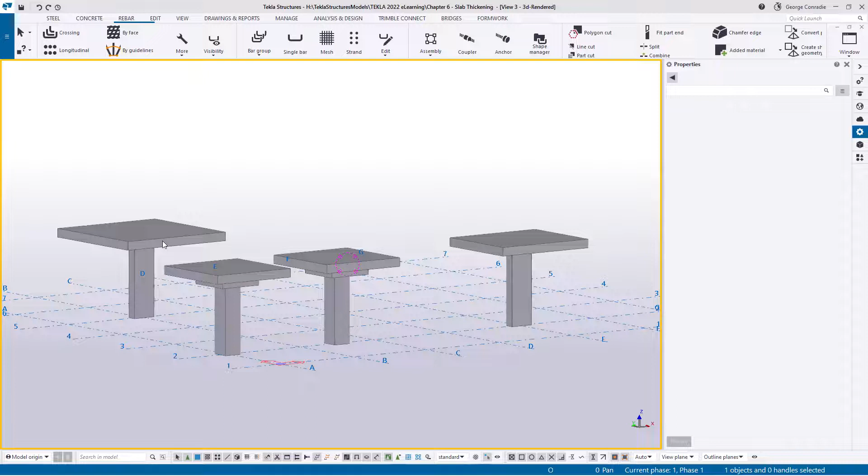I'll illustrate soon with these drop panels, and if I can just go Control 2 to make them transparent. I've already got some reinforcement in the columns just to give it a bit of context.

Now, with the drop panels, normally you would have like an upside down hat in here, and if you just go and Google drop panel reinforcement layouts in your browser, you'll see heaps of examples of how they do that. This is fairly common, but not that common in Australia.

There are also the proprietary options where you can physically go and buy shear stud, almost like shear beams that they can put over the column. They're very expensive though, and a lot of the builders, or customers or clients, avoid them and opt for the reinforcement solution. But that's a very nice solution as well.

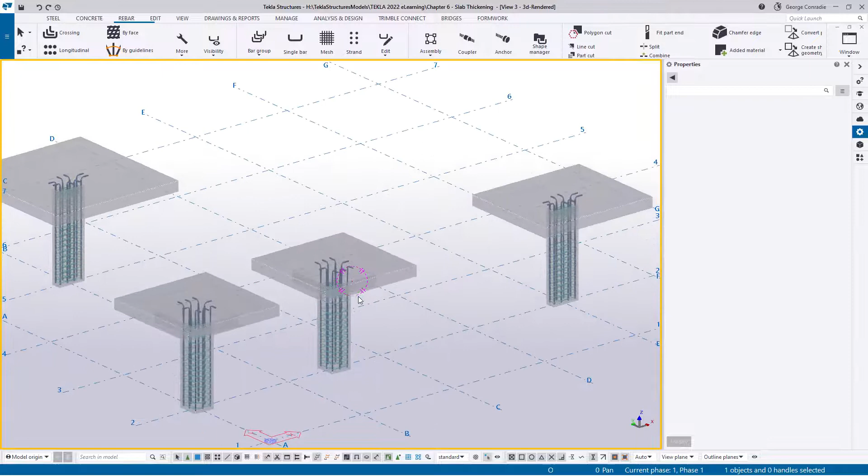But we're going to stick to reinforcement as these are reinforcement videos. So yeah, we've got two identical.

The difference between these two is this one is modeled in a way that you've got your slab, and the drop panel actually goes all the way to the top of the slab. And this one, however, we've got the slab, and the drop panel only goes up to the soffit of the slab. So we'll put bars in differently with these two to get the best out of it.

Now the third option, and for this I'll just bring my little sketch across. So in Australia, it's fairly common to have a layout like this, where you have a column, and then as an additional to your slab reinforcement, they will have a bar specified 8 20s at 300 in the fourth layer.

Now in Australia, the notation is they work from the bottom as the first layer, top is the last layer, it's a four layer. So in Tekla terms, that would be a T1, top layer 1, and the length of this bar will be 2.5.

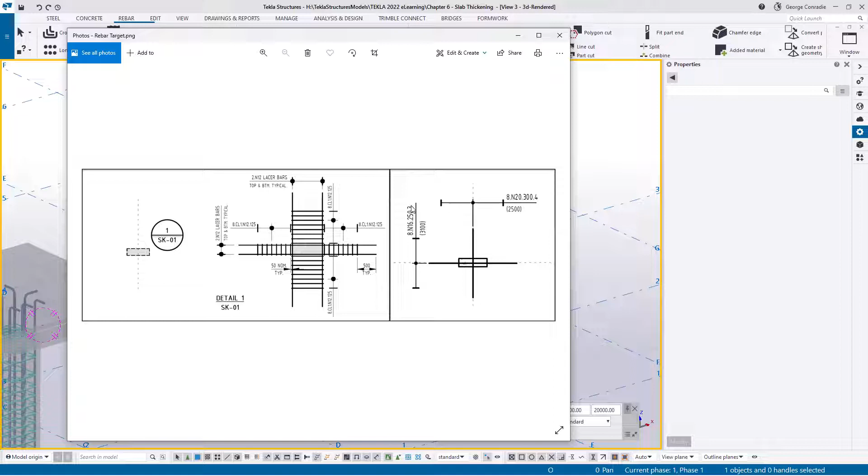On this one, we've got the 8 N16s at 250 3, which means it's a top 2, and the length of those bars are 3.1. And now the other option where we're talking about internal beams is quite often on the rebar layout, you'll see the column and you'll see a little annotation that says look at detail 1 on this drawing.

And if you go to detail 1 on that drawing, you'll see that they've specified 8 closed loop ligatures, which is N12s at 125, and that's pretty much the same on all sides in this case. They also have a bit of a 50 millimeter offset here from the column, just so you don't end up with a lot of clashes.

And then they've got lacer bars, which is 2 12 top and bottom, just to sort of frame it. So we're going to be doing all three of those in this video.

So I think for this exercise, what I'm going to do is I will open a view. Now this is our rendered view. So we want to work on the top, and that's at level 3000. So if I go to my views and I go to view list, I can then go and click my plan at 3000. I also want elevation on grid line 2.

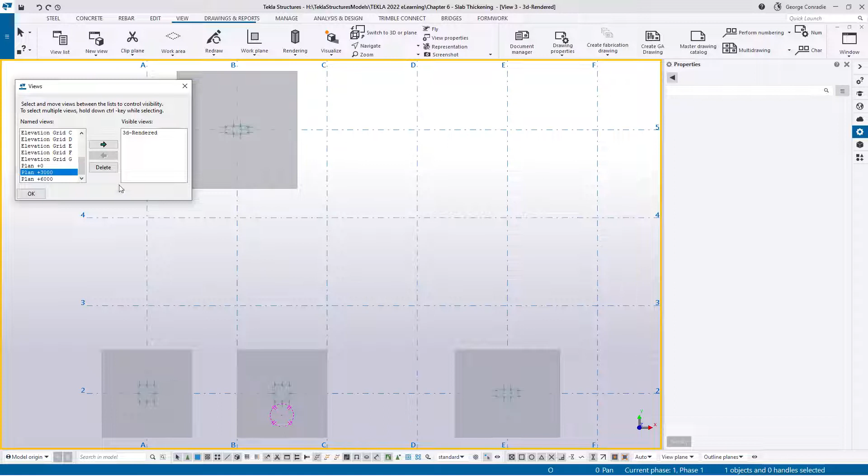So if we go to grid line 2 and pull them both across, they're both across, I can flick back to my rendered view. And then what I'm going to do is I'm going to grab these two, because those are the two ones that we want to work with. I'll grab those two, right click, fit workspace in all views.

So we only see those two columns in all our views. And then I'll also go Control P and just make sure that they're all aligned. Okay, so let's go to the 3000. Let's do this one first. So I'll show you both methods of putting in the same bar.

So when concrete is modeled all the way to the top, you can take advantage of the crossing bar in Tekla, just the crossing bar part. But when you don't have it modeled all the way to the top, then you sort of lose a bit of it, because the faces don't go all the way up to the top that you want, so you lose a bit of the benefit there. You're going to have to stretch and add faces too much.

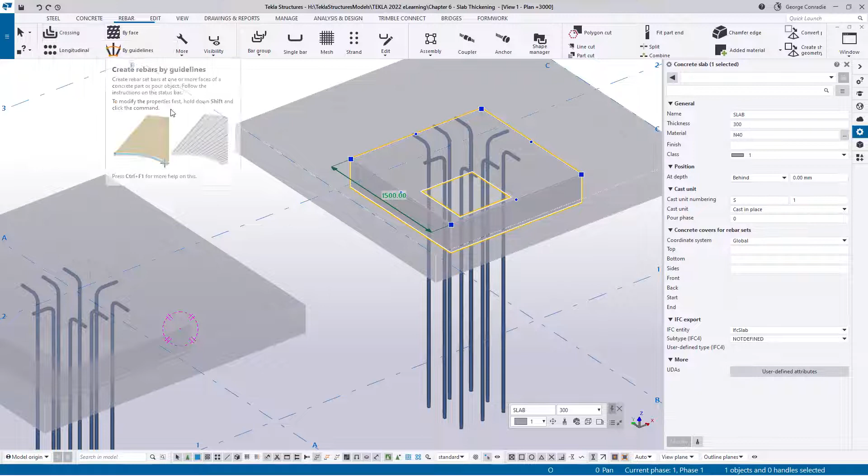Then more point input becomes a better option. I'll show both of them. So let's start with this one. Let's put the top hats into this one first, with the upside down top hats. I'll go for crossing bars, and I'm just going to wing it. I don't have an example like in the other two, so I'll just wing this one.

So in this one, we'll go in and pick a 16 bar, and I'll make it yellow to stand out nicely. I'm not going to worry about the start and end offset, we'll figure that out now. And the target is 200, I'll just leave it like that.

Now when we hover over this one, you can see we're seeing the full depth. If we hover over the other one, you can see we're only seeing half the depth. Okay, so let's use this one.

And then I'm not going to select all the sides. I'm going to pick this vertical, the bottom, and then the opposite vertical, and say OK. And then while I've got that tool going, I might as well pick this side and do the same thing - this vertical, bottom, and the other vertical - and say OK.

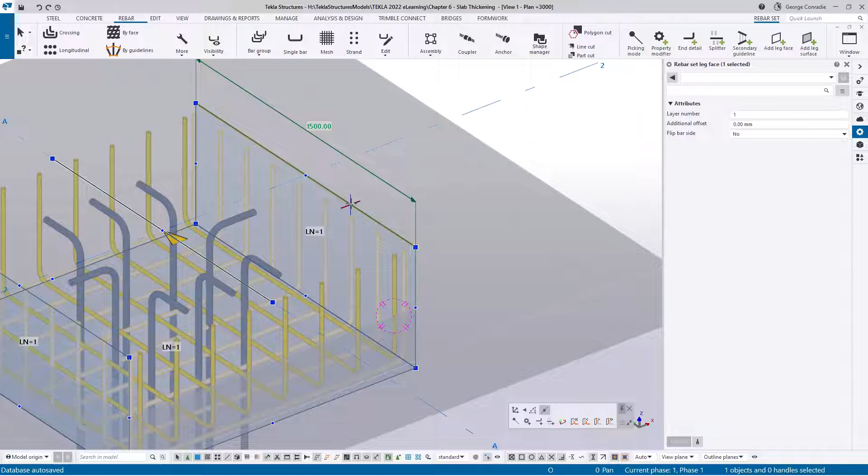That pretty much gives us the layout at the bottom. Now what we want to do is make sure, if it's not on, that your leg faces are on. Then we're going to click on this bar, and when the leg faces show up, we want to click on this edge, and then holding control, drag it - let's say 400 mils - and add another leg to it.

We can do the same on this side. Click the bar, click the edge, and then holding control, drag it. And that gives us another leg.

Let's repeat on this bar - click there, drag it 400. And sometimes when you get to a position where it's sort of lining up with another edge, like a concrete edge, it will try and snap to it. Then lastly, we'll do this one as well. So that sort of sorts out all of that, and we do need to go and look at faces.

Let's just go over to the element, and that seems to have worked all right. You can see this is our main, and we'll have to look at the top where they slot in when we put in our slab reinforcement, just to make sure they're all okay.

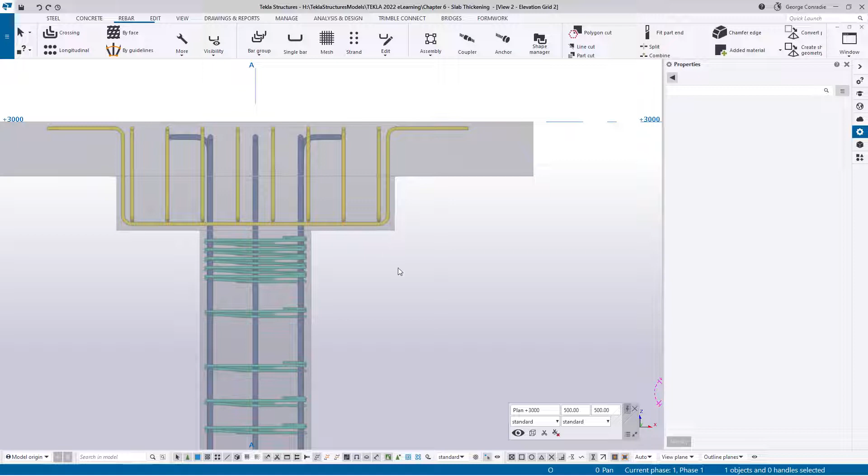I think that's okay. So for this one, we're going to have a different approach. If we go back to the crossing bars, that's not going to work. If we click bottom, top, you can see once we've done that, we need to bring those bars to the top. Now what you'll have to do is click on here and start stretching this by grabbing this arrow to there, and once you've got that, you can click on this edge, holding control, and stretch it away. So it can be done, but it's an extra step of stretching.

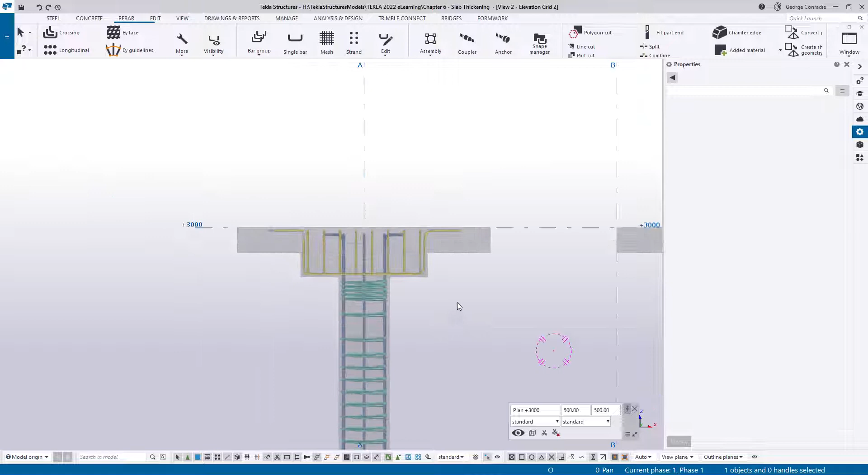So what I'm going to do is undo all of that, and go into the elevation view. I'm going to go to this elevation, and we don't have a snapping point there, and even if I use perpendicular, Tekla won't find the side. So what you're going to do is take an L for a construction line and draw up a little bit, and the same on this side.

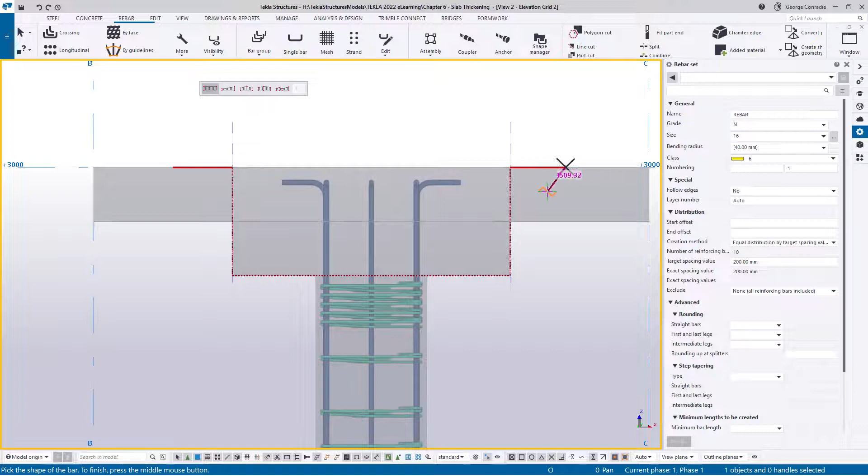So we can just define an intersection point there, and then it's as simple as going to more, point input, and just trace the shape of the bar around the concrete, like so. Don't even worry about your legs, you can fix them later. Once you've got that, the shape is defined, and if we go to the 3000 again and control P for the top view, you can see there's our bar, and we can say the range is between that point, and that will give us the result.

Now I'm not going to do all of that in this one - it's just to show you an alternative way. But what you must take note of is that in this one, for instance, we will have to check the layering.

Like in this case, if we click on that bar, we can see that this bottom face, the cover, is on the wrong side. So all you have to do is say flip the bar, and it flips that face only because we highlighted that face.

The next thing we need to do is click here, right click, and go to inquire. You can see that your A and your B dimension are odd dimensions, and maybe we want to force 400.

So what we can do in this case is click on the bar, go to detail, and load our standards. For the hook type we don't want a hook, and for the adjustment type we want a leg length, and for the leg length value we want to do 400. With that we can just hover over this edge here.

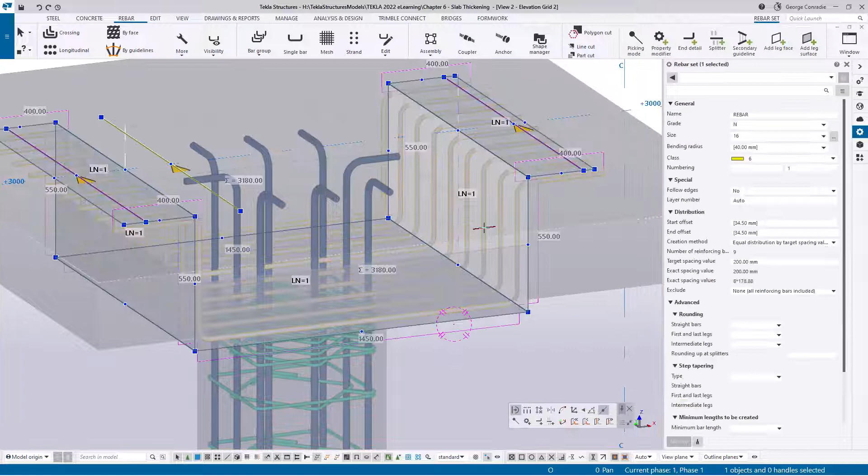There we go, that's 400 now, and if I click on this one as well, that will be 400. Now if I click on the bar, right click, and say inquire, you can now see we've got our A dimension at 400 and our E dimension at 400.

So that's perfect. Now we do need to do it on these as well, so for those, I'll just right click to show. If we go inquire, you can see we've got arbitrary values here.

So just to ensure we've got the right leg we want there, we'll keep our settings as we had before, and then we can just click on this one and hover over to the other side, click on this one, and then the other legs, click on this one, in detail, pick this side.

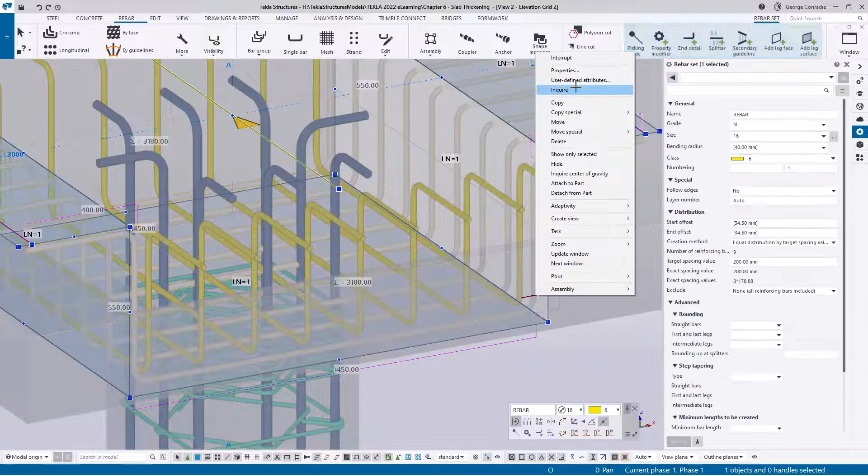You can see as I click on it, Tekla immediately fixes up the leg length. And now in both these cases, if I click on that bar, inquire, we have our 400, 550, 550, 400, and then the bottom leg is 1450.

And if we look at the other one, this one will have a different depth. We've still got our 400, but now we've got 530 instead of 550 because of that difference there, and then 400. So that worked out pretty well.

So now that we've got that, what we can do is just put in some bottom and top reinforcement to show it in context. For that, I'll go straight to our level at 3000 rather than using the elevation.

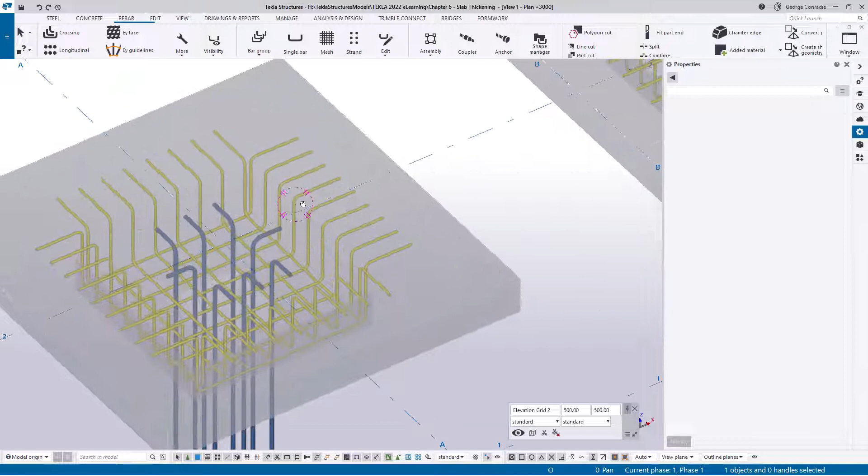What I'll do is go by face, and just load the standards again, and 12s in this case is okay. I'll just make it 12 main rather than 12 ligature, and for the class I'll stick to 2. We'll do the offset in a minute, and the spacing at 200 is fine, so let's just leave that.

Then what I want to do over here is create it on the near face, that's this face closer to me. I don't know what the direction is going to be, I'll just pick a direction, and I do want the whole face.

As soon as I hover over this, you'll see that Tekla lights up where it's going to put the reinforcement, and the side you pick is going to be the main one. Our orientation at the moment shows bars in that direction, but what I'm going to do is say I want it in both directions, and then if I hover over that, it will create the bar.

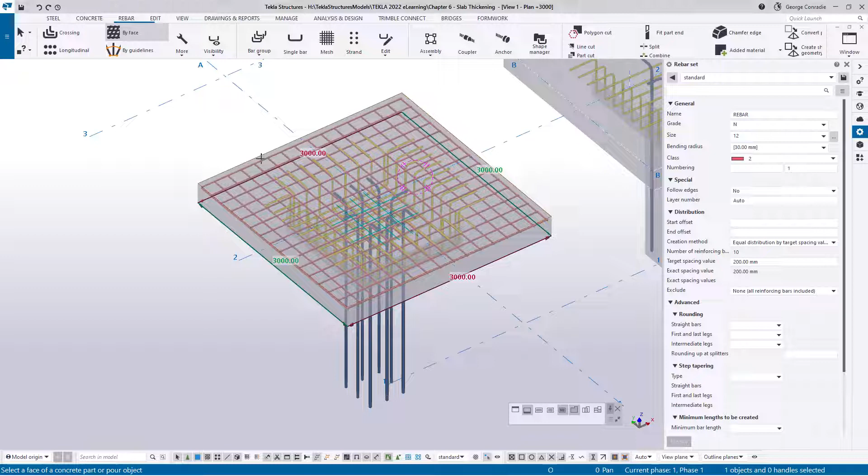Then I can just go and pick the bottom and hover over the same, and you can see the polygon that Tekla is showing you there, and if I click that, it will show us bottom reinforcement. Now all we need to do, Control P, is just go and look at our spacing quickly.

So if I pick all of them and make it, say for instance 100 by 100, just to get it away off the edge a little bit so it looks better, we can now see all the reinforcement in there. And now we need to just finalize our layering.

So you can see because we put these yellow bars in before the red ones, and because these are secondary, let me just give them a different color so it's a bit more obvious what's happening here. So these red bars on top should be in layer 1.

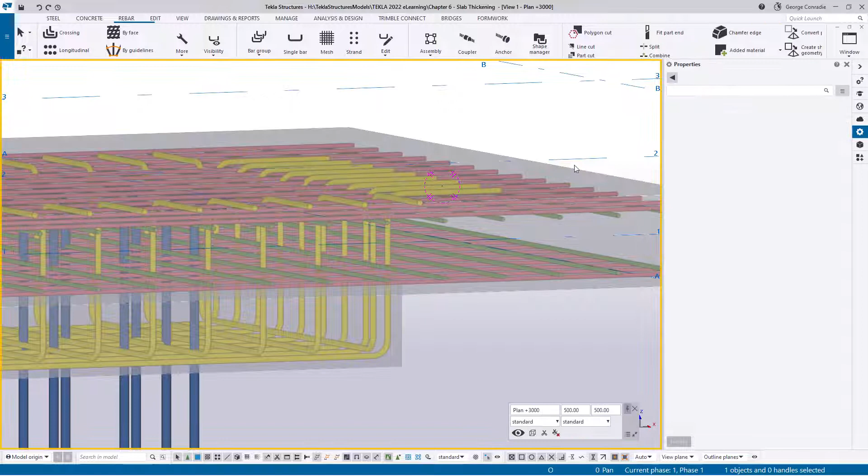One note before I do that: if you click on this bar and click here to move to the outermost, it's going to flip all these around, and that's not what you want. You want those yellows to stay where they are. In this case, you click on the face and change that face from 1 to 2, and that will only manipulate that bar without screwing up the other bars. So you can see that's exactly what we want.

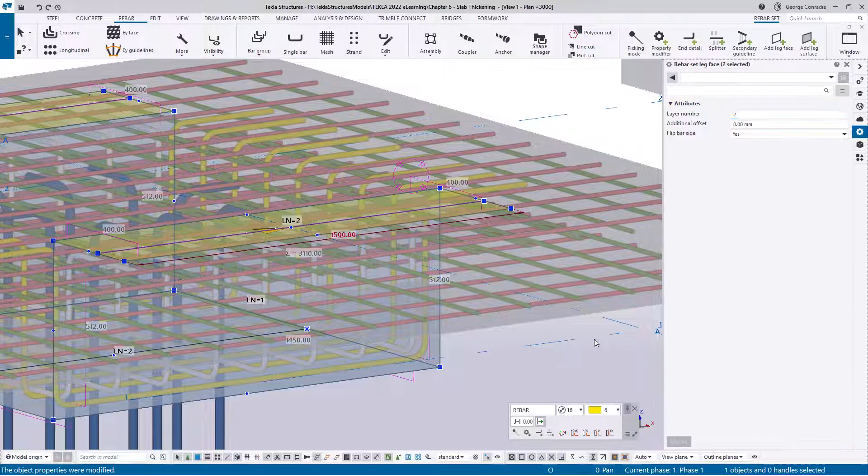We'll have a look at that bar now, and then for the green bar, click on the face again and make sure it's in the second layer, and that's correct. Then for these bars, if I click on these yellow bars, this face and that face cannot be in layer 1, it's got to be in layer 2. So if I click there, layer 2, you can now see Tekla puts that into the layer for us. At the bottom, we can check the bottom two layers to make sure. If I click on that layer, that's 1, that's correct. If I click on this green one, click on its face, that's layer 2, that's correct. So that all works out quite nicely.

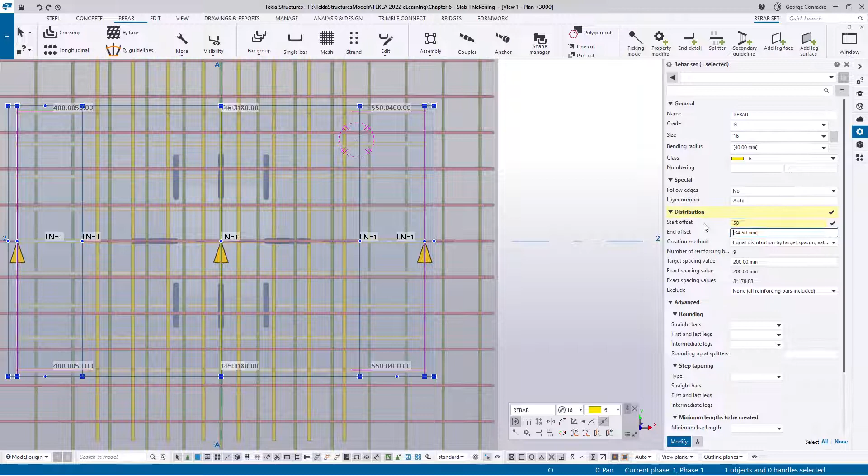Now, in terms of bars that clash, like this one sitting on top of each other, what we could do here is say these are 50 off the side, just to get them away from the corner a bit. And these can be the same. Although Tekla's come up with 34, so let's leave it like that because it's obviously calculated where the rounding of that bar is. That looks pretty good.

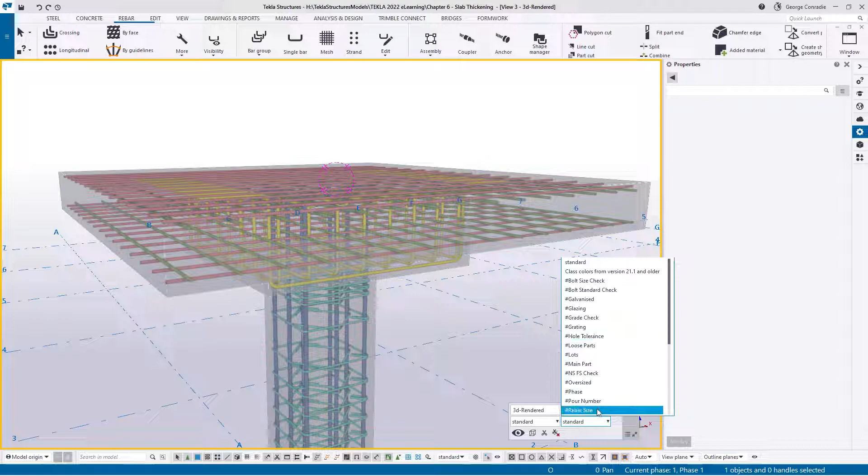Nothing is clashing now. Now what I'm going to do is grab this one in rendered view, right click, fit in all views, so we only see that one. Then I'll also go to Control P, put it up in its perspective view so we can see nicely what this looks like. And then to really make it stand out, to show what we've achieved, we can go to our reinforcement view. Okay, and there we go.

And then lastly, if we go to our presentation, what we can do is show the 12s, because that's what we've got in the slab. We can show them as light gray, also show them as 90% transparent, and also show the concrete as 90% transparent. Once I've done that, save, modify, apply, okay.

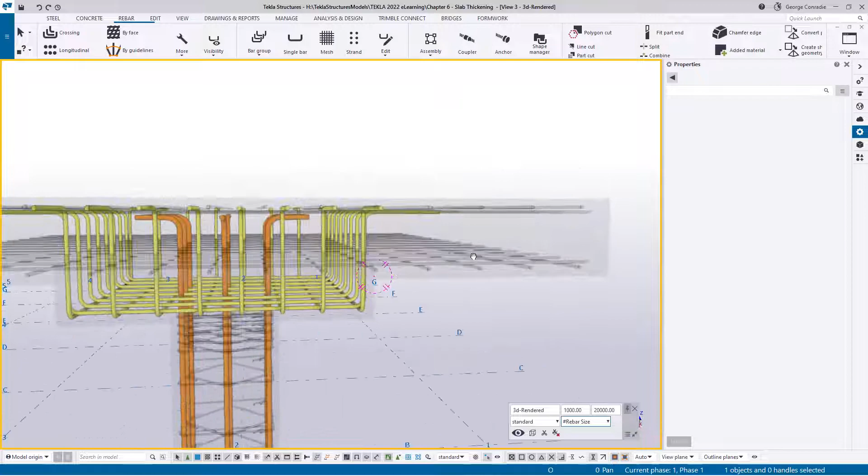If we now zoom up here, we can clearly see what we've achieved. The light gray transparent bars are the reinforcement for the slab, and the yellow bars are the shear drop panel reinforcement. You can also see the column reinforcement sticking out nicely there. So that's a pretty good solution. It's a very easy thing to reinforce, and you can get it clash free pretty quickly.

So let's move on to the next example, and I'll flick back to my standard view here. I'll also go to orthogonal, modify, OK, and in this I'll go entire model. This one here we don't need anymore, I just showed the alternative, so I'm going to delete that. Then let's focus on this one. I'm also going to isolate this, grab this, right click, fit in all views, so we should see only that one in 3D and in the elevation.

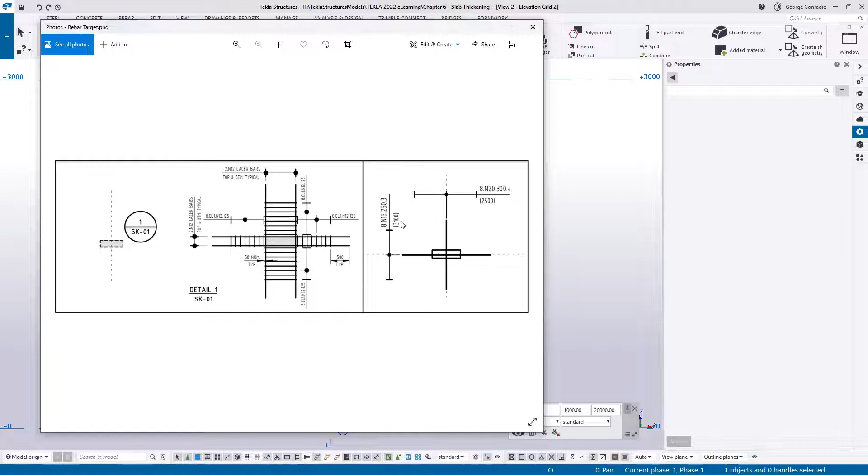Okay, so what we're going to do with this one, I'll just drag my sketch in again. We're going to go for this option where we have 8 N20s at 300 in the top one layer, and then 8 N16s at 250 in the top two layer with the different lengths of bar. So we'll just take note of that, and I'll drag it away again.

So for that, I'm going to go over to level 3000. Now, what would have been very nice is if we had the ability to go to edit and go construction object and go poly offset. Maybe we should just do some calculations first before we fill that in. So they want 8 N20s at 300, which means it's 7 spaces.

So 7 times 300 is 2.1. If we divide that by 2, we need to offset that by 1050. If we could click in here and use the grid line to offset, that would have been fantastic, but Tekla can only offset from construction lines at this point.

So if we draw a construction line along the center there, just make sure it clicks. Along the center, we draw another construction line along this center of the grid line. And we try and offset now, Control O, and we plug in our 1050.

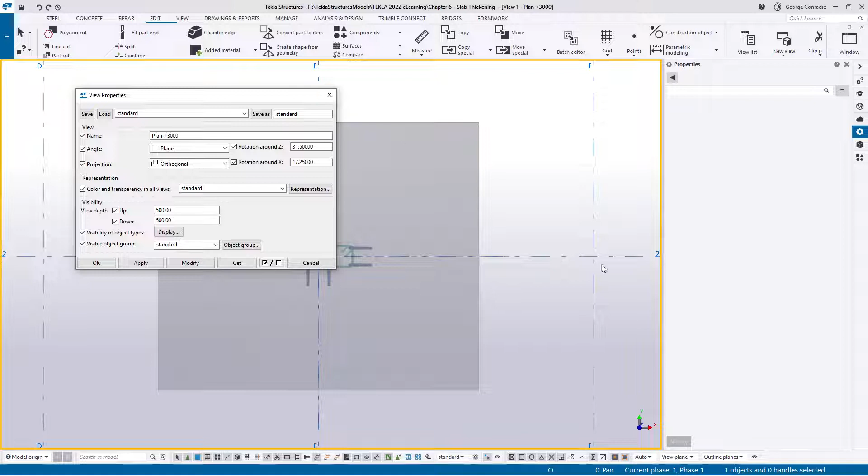Again, if we click on the grid, you can see it selects the grid, but it won't offset it. So the workaround here is to just go into your visibility settings and switch off your grids for the minute. And now if you go Control O, you plug in your 1050, you can now pick that construction line, and just like that, it now offsets it.

So that's the range, and the length is 2.5, so it's 1250. So if we type in here 1250 and we offset these, that is the area of influence of the top bar.

So what we can do now is we can go to Rebar, and we can go to Face, and the bar he wants is 20s. I'll keep it yellow, and I will make these 0 because we're working with absolute.

It's got to go from there to there, the middle of the bar, so it's got to be 0, not cover. And then for the number, he wants 8 bars. So what we do is we plug in 8 bars here. And I think that's it.

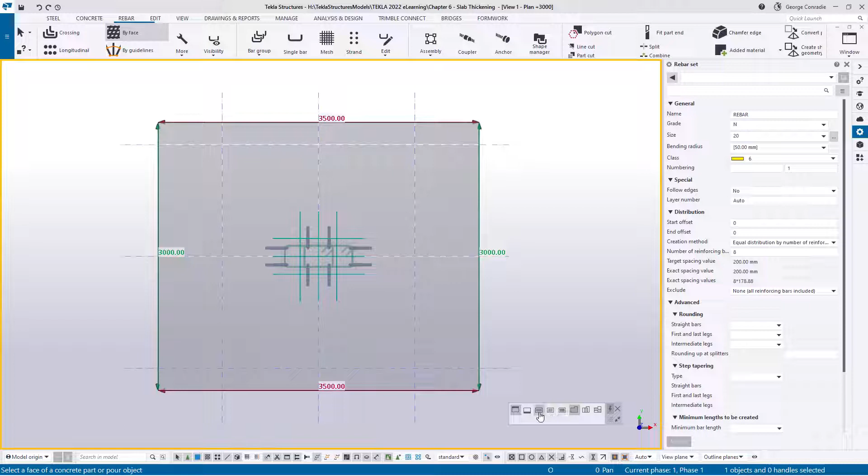And then we've just got to say we want this on the near face. I don't know what orientation we're going to have, so I'll just pick one. And we don't want the whole face, we only want a rectangular face.

And now what we can do is we can click on this area, and we can see our orientation of our bars are wrong, so we pick the other one. And once we pick the other side, Tekla gives us our 8 bars with the correct length.

Okay, now for the other direction, if we look at here, he wants 8 at 250, so it's 7 times 250, and he wants them 3.1 long. So if we go and we say Control O, and we do 1550, that's for the length of the bar, and the length is along this path.

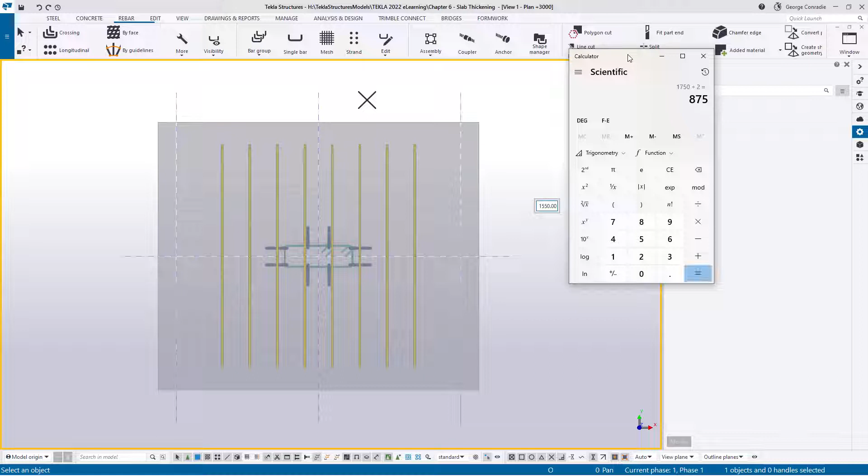And then for the spacing, he wants 7 times 250 divided by 2, so it's 875 a side. So if we plug in here 875, we can then offset these two construction lines just like that.

Okay, so now that we've got that, what we can do is we can go to our by face again, and this time we want 16. So if we grab the 16 bar main, I'll keep them at color 6, and then 0, 0, and 8 bars, and everything else is the same.

So again, make sure that you're selecting by rectangular area, and if we pick here now, we can see the orientation of our bars are incorrect. So we just flick it over to the other direction, and then we can click, and just like that, we've got our reinforcement. Now what we can do is just get rid of those construction lines.

We can also bring back our grids. Okay, so let's look what happened. If we look at this now, we can see we've got this in layer. So if I click on the bar itself, and I head over to my custom inquiry, and we make sure that you select on this drop down list the rebar.

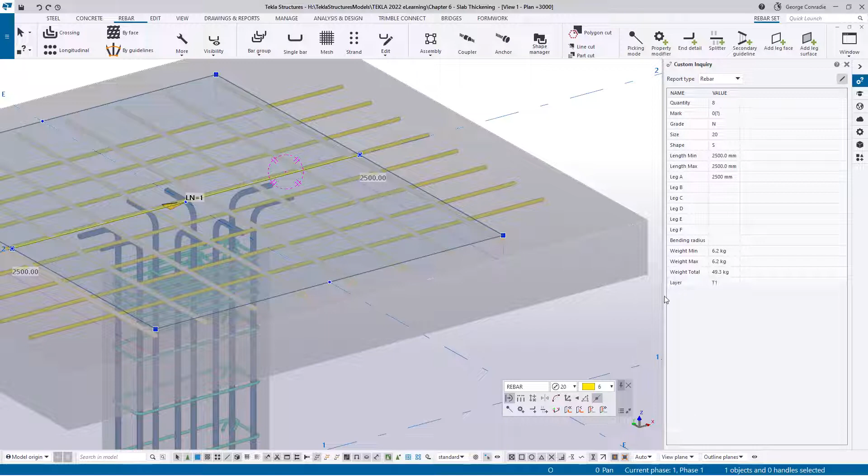You can see we've got this in the T1, the top 1 layer. And if we click on the other bar, you can see that's in the top 2 layer. And I'll just switch off my leg visibility for this exercise. Okay, so now that we've got that, let's just put in some reinforcement in the top of the slab.

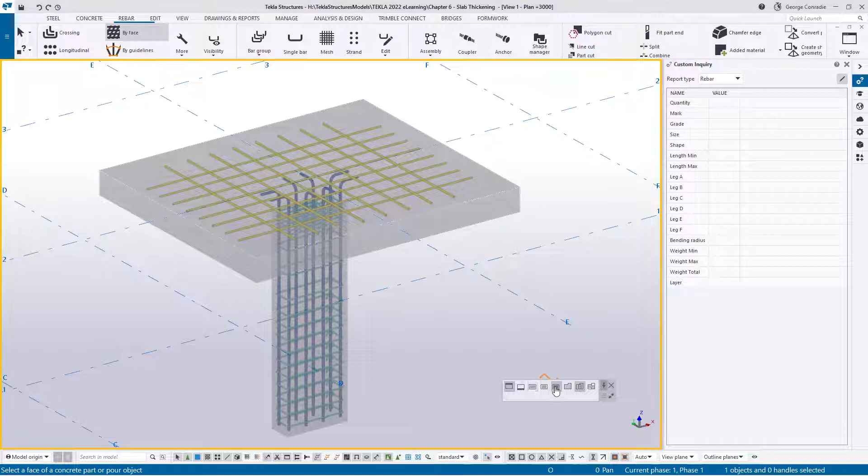So I'm going to go to the near face, which is the top from where I'm looking at, and I'm going to do both faces, and I'm going to pick the whole panel. Then because this is the main direction, I'm going to make sure my cursor is closer to this side, so it puts those bars in the top face.

Also, I need to check what bars I'm putting in, so I'm going to stick to, say for instance, main 12s, and I'll make them a different color. And for this, I'm going to actually delete the start and end offset, and I'm going to make distribution by target, and the target's going to be 200.

I think that's cool. Okay, so now that we can pick our polygon and say click, and that adds the reinforcement for us. And then we can pick the bottom of the slab, the soffit, click, and that adds that.

Now the first thing that I like to do is I take my, so this has actually gone different to what I thought. So if we click on this one, we can now say that's interesting, that one came out right, but this one I must have just been closer to some other line.

So what I can do is put back on my visibility, click on this one, click on this face, and say instead of 4 you have to be in 1, so it pushes that up. And this one, instead of 3, it's got to be in layer 2, so that sorts that out.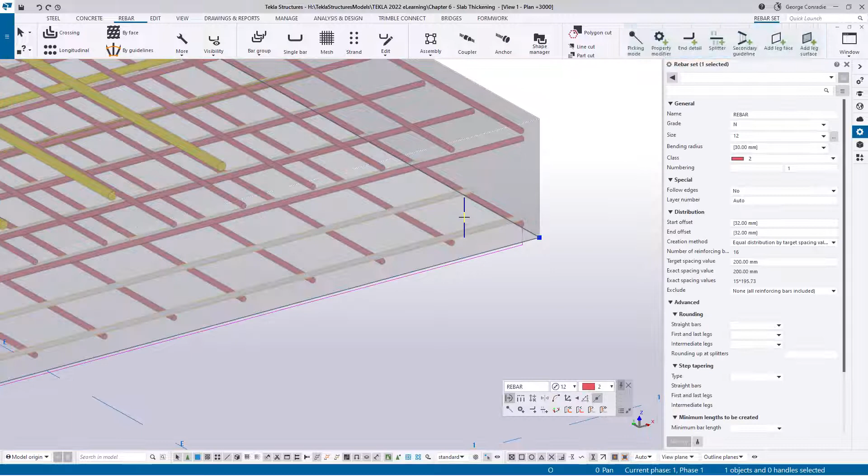Okay, so now what we can do is just make sure that these are on the right layer. So that's in 1, that's correct, and click on this one, and that's in 2, that's correct. So for the secondary layers, I like to make them green, just to separate them from the main.

So we get that. Now if we look at that, we'll see that we've got the yellow bars in layer 1 with those, and we've got in the opposite layer, we've got those yellow bars in layer 2.

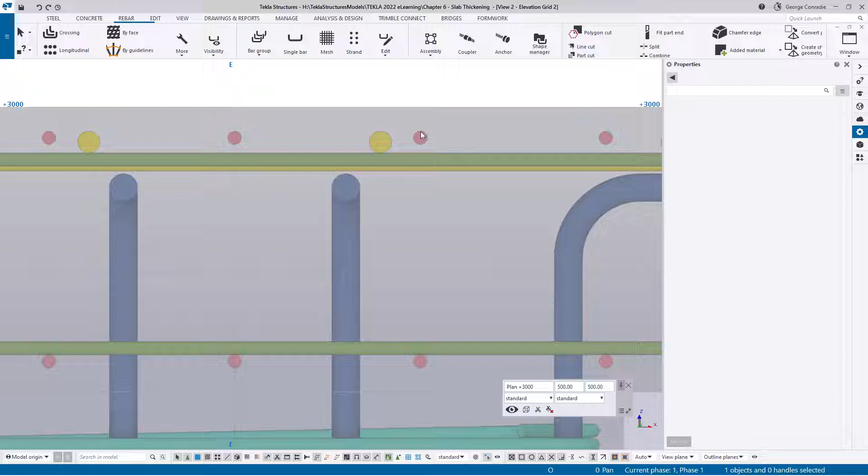Now if we go to the elevation, you can see that Tekla uses the bigger bar for the offset, so the cover is measured to this, and the second layer is then determined to the bottom of this one, not this one. So essentially on site what will happen is this will just drop down onto that bar, but it's fine the way that Tekla is showing this.

And then in terms of the spacing, Control P, what I'll do here is I'll just go grab both of those, which is the slab reinforcement. I'll just add, say, 100 millimeters on both ends, and yeah, I think that's good for this illustration. It's not clashing anywhere, it's not touching other bars.

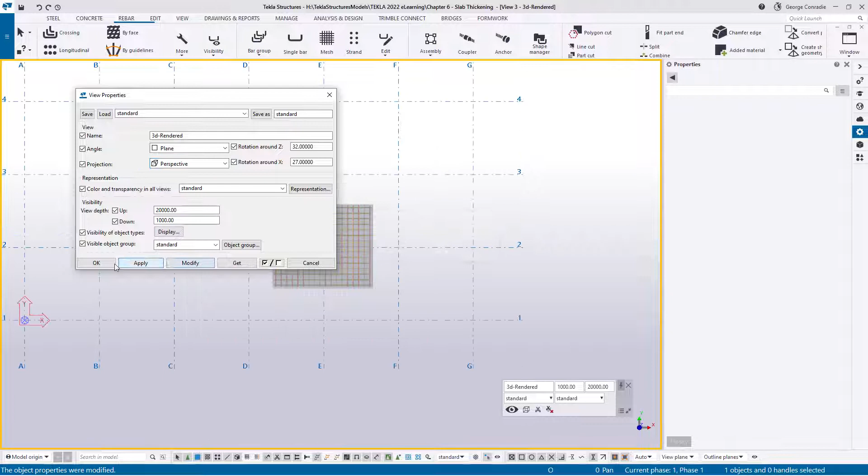Okay, so for the visual, we can do exactly the same what we did with the others, just to have a look at what's happened now. If I double click, I can go first to perspective, modify OK. And then for the view, I can just go and pick our rebar size and then have a look at what's happened here. So you can see here, if we look at this, how nicely our column reinforcement comes in.

We've got our gray transparent bottom and top reinforcement for the slab, and then the magenta and the yellow bars obviously being different diameter. This is a 20 and this is a 16, depending on how you've set up your rebar size presentation. This will come up, but it gives you a very nice visual of what you've actually done, and to quickly see if there's any problems with clashing and stuff.

And as you can see there, we have absolutely no problem. I know this looks fairly simple because I've just got a little patch of slab, probably about a 4 by 4 meter slab. You probably have more, but if you have clashes with column reinforcement and stuff, you'll just have to move them out of the way. Also a fairly easy task.

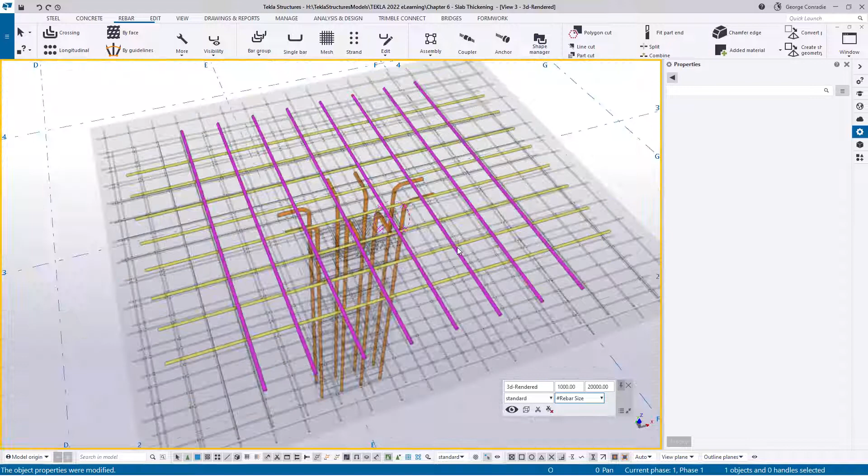So what I'll do is I'll go back to standard mode, and then also I'll go to an ortho view, and then what we can do is right click, fit entire, and lastly we're going to be looking at this. Now for this one we're still going to be working on 3000, but we're not working on grid 2 anymore, so I'm going to kill grid 2. We want grid 5. So what I'll do is I'll go view and I'll go grid 5, but I also think we need grid B in this case.

So I'm at the same time just going to open B as well. So we've got 5 and B open.

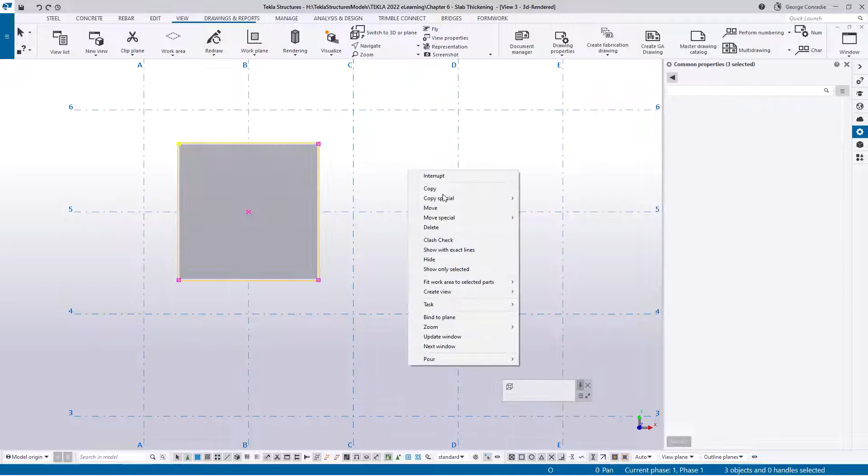Okay, so what I'm going to do now is go back to the rendered view, pick this one, right click, fit work area in all views. Okay, so now we've got that level at 3000, which is the top of the column, this is our B elevation, and this is our grid 5 elevation.

Okay, so what we can do now is have a look at our sketch again. So what we want to try and do is put in these ligatures, which are N12s at 125, and there's 8 of them, and they start 50 millimeters off the column, whatever that dimension is, and it's the same on all the ends. And pretty much it's the width.

I don't know if you guys can see the hatch part there. As long as this bar sort of crosses over the column, I think it'll be good. So they've not dimensioned this, which tells me they're not critical about the dimension. You've pretty much got to try and avoid the vertical reinforcement of the column. I think that's the aim here.

So let's just see where we plot. Your scenario might be totally different, but we're just going to try and avoid the column reinforcement, these blue verticals you see here.

So the first thing that I'm going to do is draw a construction line. Now I've got a shortcut L on my keyboard that gives me a construction line, but if you don't know where it is, it's under edit construction object. You can see it's highlighted there because it's active. And now I've just disabled it, so we'll just fix it.

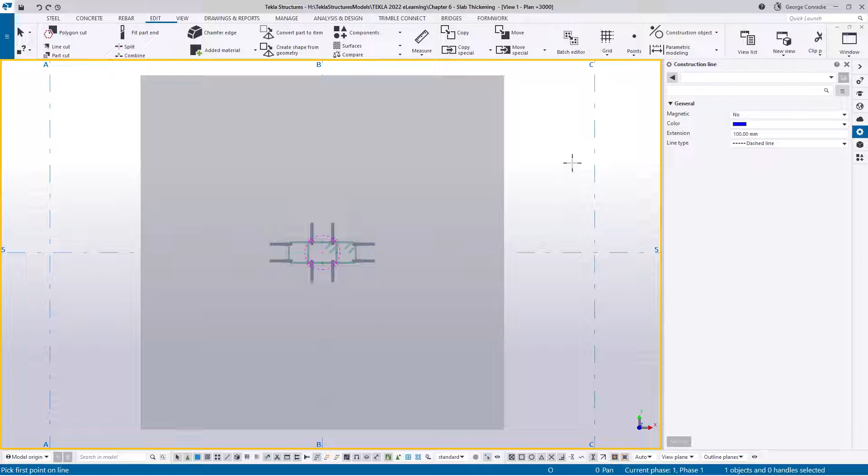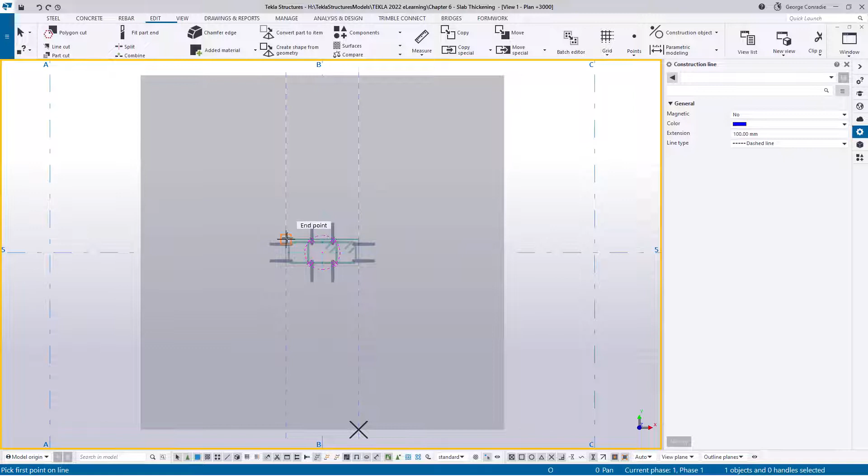What I like to do is hover over the point, hold in my control key and click. That gives me a temporary snap, and now I can move up to the edge of the slab, and you can see the red, which means that's only the first points at the edge of the slab. And now I can go down, and that's how I quickly get my construction lines drawn. So we've got those two, and the same here, control click, edge, opposite edge, and then over there control click, edge, opposite edge. Okay, so that basically gives us the band we want to work in.

Now, the first thing that I've noticed, I've got a Control O keyboard shortcut for copy with offset, but what we can do in here is plug in a 50 there, and the first thing we can do is, because this is not on the grid line, it's not on the object, it's sort of freehand, I can now select it and offset it. I'll do the 50 millimeters that the engineer is asking for clearance, and then we'll do a bit of maths.

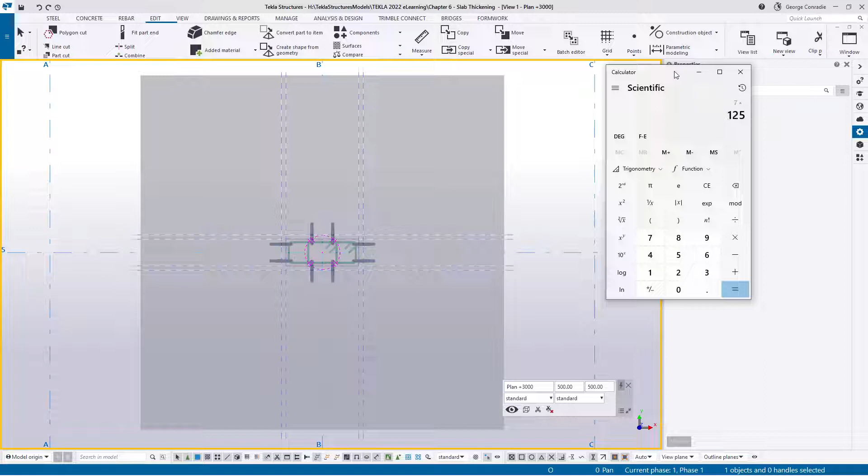Now he's asking for 8 bars at 125, 8 ligatures at 125, which means that we need to do 7 spaces. So it's 7 times 125, it's 875. Okay, so what we can do now is go Control O, and in here we can plug in 875, and then we can just offset these. Now we know that's the full extent of where the bars are going to go.

Now, the reason why I'm doing these construction lines is because these are all internal faces to a slab. There's no concrete to click on. So we need something to click on to establish the range and the extent of the bar. And that's pretty much what we need. I'll just escape out of that.

The second thing I'm going to do here is just type F to get a measurement tool going. And what I want to do is just measure this gap there. So that's 400, basically from that 50 millimeters to the opposite 50 millimeters. I'm going to do the same on this side, click from there to there and just put it there somewhere, and that's 900. Okay, so I'll remember that because that's important when we put in the ligatures.

Now, first thing I'm going to do is pick a dominant side, which band is going to run through and which is going to be secondary to that one.

So if we look at the sketch, yeah, again, the engineer didn't actually show. There might be a history to this particular project that I'm not aware of, and I don't have the detail because this is just a clip I got. But I'm just going to follow this. I'm going to assume this big one is the dominant one and the small one is the secondary one, so let's just use that.

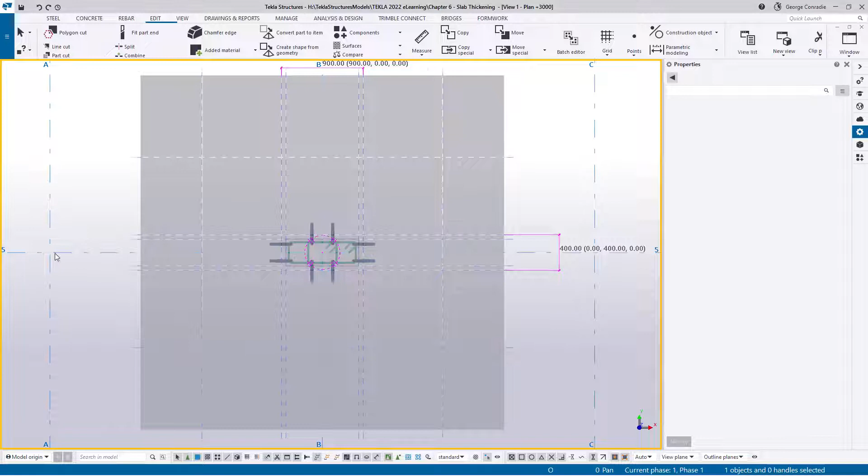So what I'm going to do is go to the grid line 5 elevation, which is this one, grid line 5. And in here, I'm going to go to Rebar, and under Rebar, go to More, and go to Point Input. Make sure I pick Linear, and then for my Rebar, I'm going to select a 12 tie because that's what he's asking for.

For the class, I'm going to select a 5. And then for the start, I'm going to make sure I select 0. Remember, a 0 is different to a blank. If you leave the start and end open, Tekla calculates an auto offset based on the rounding of the bars it fits into. If you make it 0, Tekla forces a 0, and that bar will be smack bang in the center of wherever you picked. For the spacing, I am going to say a target spacing, and this one is going to be 125. All right, so with that in mind, let's just add.

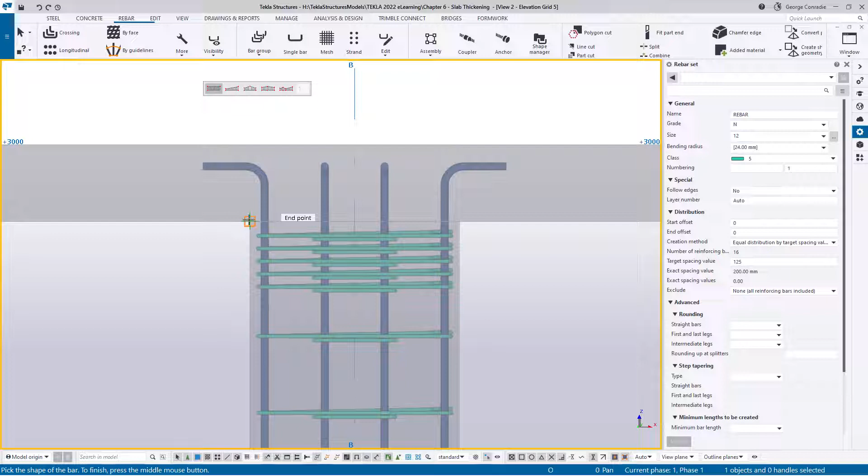Now I want to draw a ligature in here. So again, the way I do it is I hold in my control key, click on that point because it's a known point, and that becomes my first point. And then I can go across, and I know my column is 800. Click, down, 300, click, back, click, and then just finish off to where we started. And now I can say middle mouse, so you can see our ligature there.

And now if I tab back to plan 3000, what I can say is these ligatures go from this end all the way down to that end. And now we see a lot of ligatures there, and they might not be right because there's one in the middle. So this is what you do to fix that. You click on the ligature, and the only thing you have to do is say, I want to change it to exact spacings.

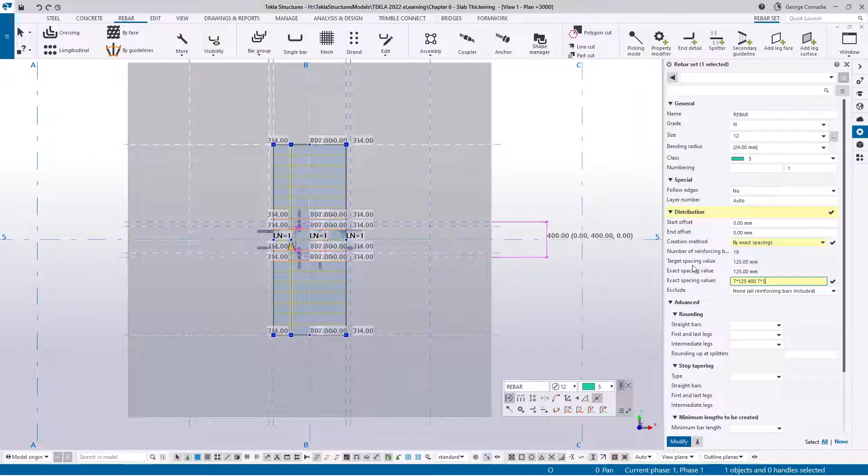And then in the exact spacing bar, we know that the bottom part is 7 spaces at 125. And then from our measurement, we know we've got a 400 gap. And then on the opposite side, we've got 7 at 125 again. And once we do that and say enter, we can now see that those ligatures are exactly as we've set out on our grid line. And this is one set going right across.

Now, all we need to do is take this one. First of all, just before we do that, let's just flick across the elevation and have a look at our, what do you call it, faces.

Again, the bottom face has picked the orientation the wrong part. So what we can do is just click on that face and flip it across. And now if we go Control P, you'll see the ligatures within the slab. Okay, and at the moment, it's reading all the faces as 1, 1, 1, 1.

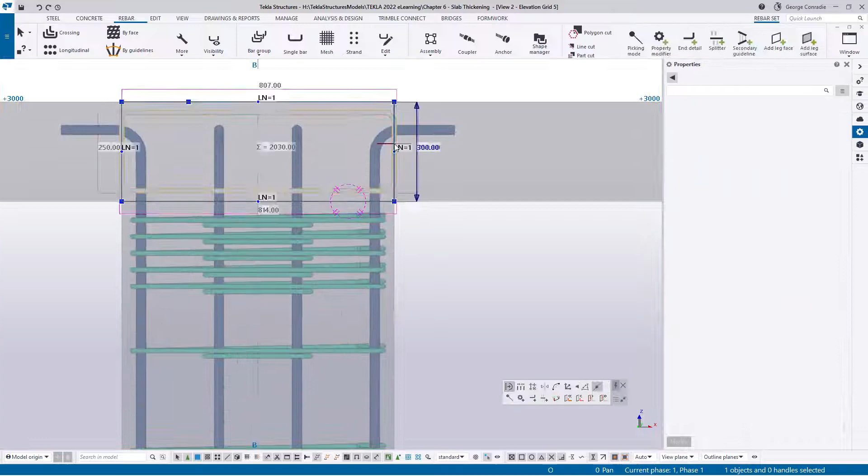Now take note, because if you look at this one, the face is in the middle of the bar, and it says leg 1. It's because there's no concrete face there. It can't apply a cover because there's nothing to apply the cover from.

So in that case, this is where Tekla, if you click on that face now, came up with this idea that you can flip a bar to either side. In this case, there's no either side, but you can offset it. And once you offset it, you'll realize which side it's going to flip, and then you can just toggle the flip to pick the side you want. So it's a pretty well thought-of tool, I think. You know, these guys really did a good job.

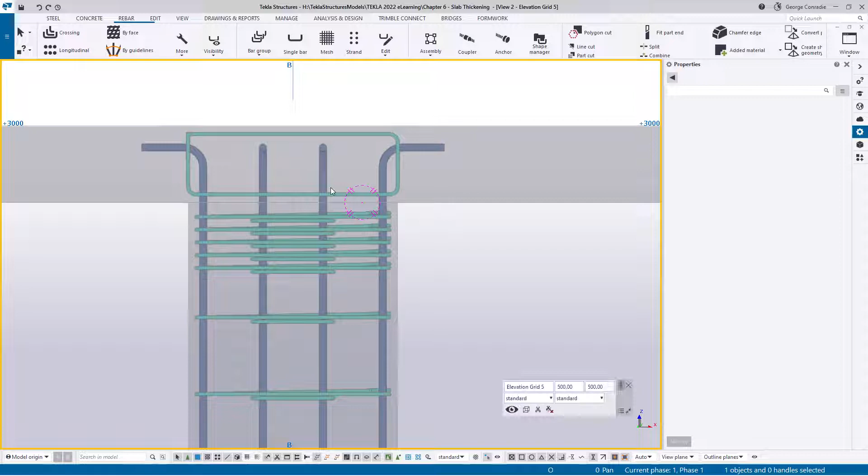You know, when they got this cover thing working on the rebar sets. Now, once we've got that, let's flip across to the plan 3000, and then I'll click on the bar, go to end detail, and load my standards. Make sure that I've got a 90 degree, because these are always 90 degrees. The ears, if you have 135, it always causes problems. And then I think that's it.

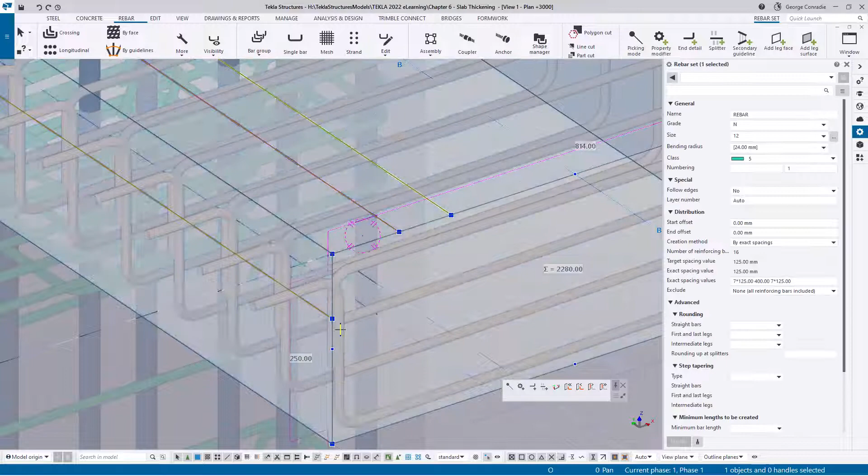Now what we can do is hover over the edge, just make sure that it actually gets the edge. So we hover over this edge and then hover over this edge. Sometimes you can get away with just picking on this edge, but because sometimes when you have a leg that doesn't have an offset, it puts the hook on the wrong side. This is why I picked 2 different end modifiers, because now I can pick this one and flick it around 180 degrees, and that's done. So the ligatures are in place and we're happy with them and they work.

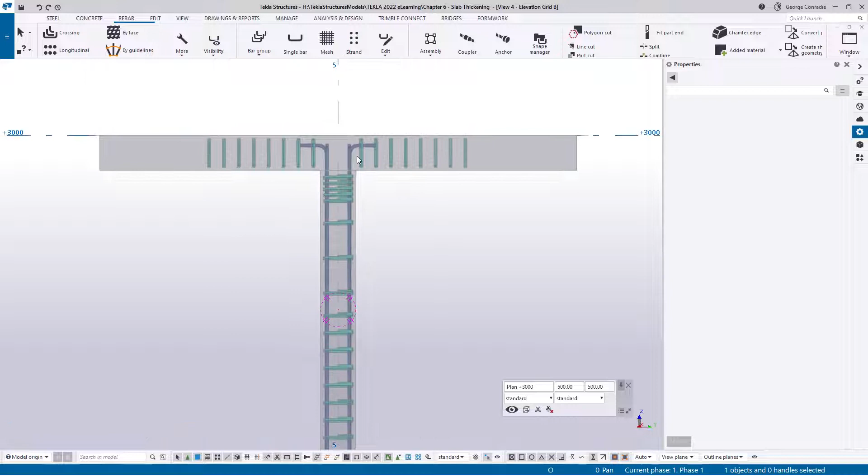Okay, so let's go do the same on grid line B. So this is grid line B, it's the smaller one. Again, we can go to more, and we go to point input, linear, make sure that all our dimensions are correct. And because we have this already set up and we know that the other dimension is 900, we can just fix that up straight away.

Now what we can do is, again, I'll go to the bottom here, holding my control key, click, go to the top because that's where I want the ear to start. We know it's a 300 column, click, just follow it around to complete your shape. And then middle mouse, and then go back to your top level, which is your 3000, and say that these go from here all the way to here. Now, just like that, we've got the ligatures automatically in the right space.

You can see center to center, there's 8 of them, they're 125 spacing exactly, and we skipped the 900 in the beginning. So that's a quick way of dealing with that.

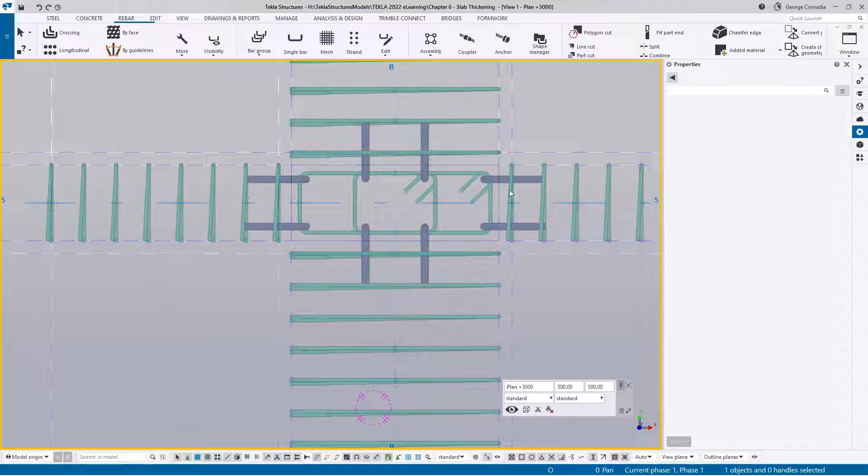So now what we can do is just add the ears to this one as well. And also we have to make sure that the layers still work. So for these, I'm just going to say standard to load them all. And I'll pick this one, that's correct. And then when I pick this side, just got to find the side. Oh, there we go. Sometimes it can be challenging if it doesn't find the leg, sometimes you have to turn it around a bit.

Okay, so it took me a while to find that, but I can already see that it looks like there's a problem there. So if I look at the elevation again, we've got an issue here.

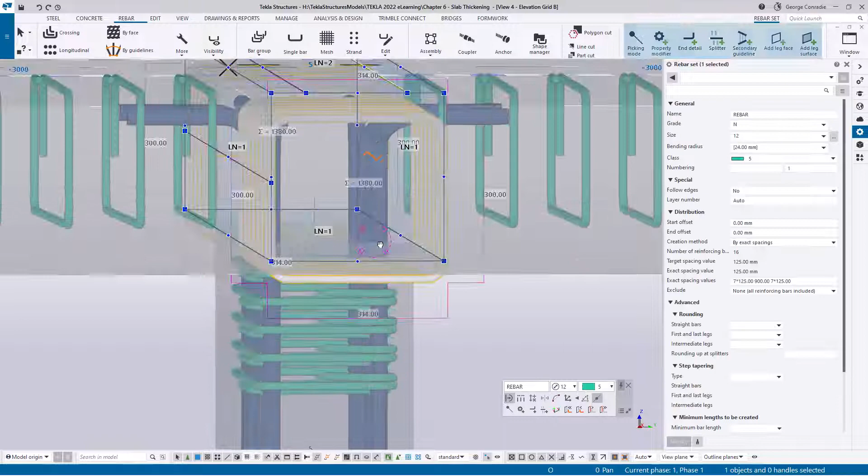So this one, if we click on this one, now this is going to be the dominant, so that's in level 1. So this one has to be in level 2, which is correct. And this one, we first of all got to flick the switch, so to get that in the right elevation. And it seems like that one will be fine.

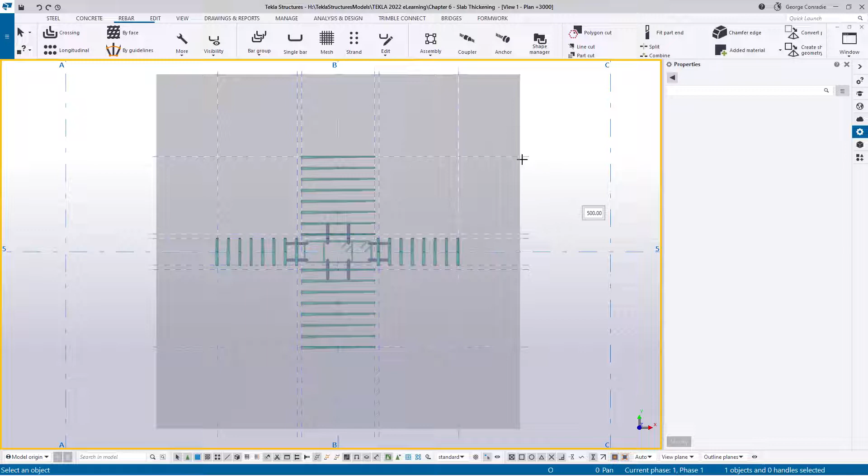Okay, so what we need to do now is if we go back to the 3000 level, which is the top level, all we need to do now is add our main reinforcement. Now, if I drag my sketch back in, you can also see they've got a dimension 500 typical of where these bars extend past the ligatures. So what we do is we just go Control O, 500 to the default, and we can just draw a little construction line so it gives us a point to measure from. And also this one, and also this one.

And now what we can do is we can use by face again. We go near face, and I don't know which direction, and I've got to make sure that it's rectangular. And in here, we've got to make sure that we've got our 12s, and I'll just change the color to yellow. And then this we want to clear because we want Tekla to try and calculate. It's going to have a problem with the calculation because there's no face it can measure from, but we'll fix that up now. And then for the spacings, we've got a number, and what he wants is 2 top, 2 bottom. So we have 2 bars.

So that's it. So now that we know that, we can just click on this face and hover over to the top. And you can see our bar direction is wrong.

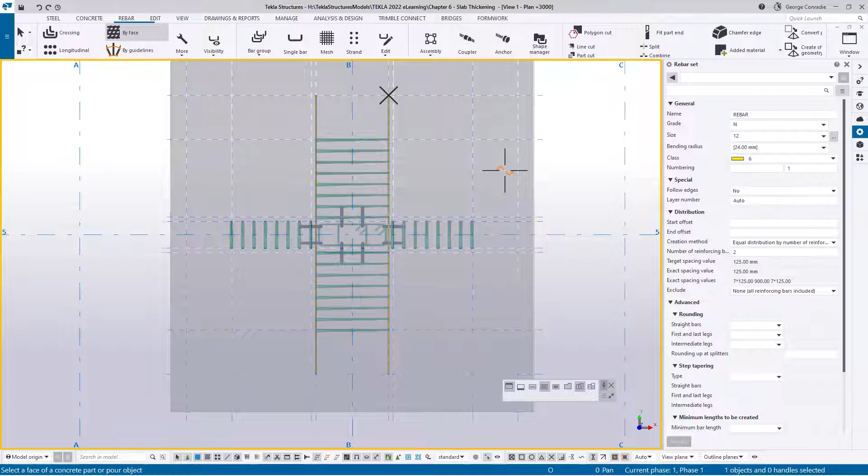So let's flick it and go over to the top face. That adds our 2 bars. While we're there, we might as well do the bottom face, so click on this one and repeat, going from here to here. Then let's do the other direction too, flicking this one and this one, clicking all the way to there, then going into the bottom face and clicking the same direction from there to there.

Now that we've done that, we can go over to the elevations and see what's happened. If I go to this big one first, we can see what Tekla's done with this. The first thing is it's got the layer wrong - you can see there's layers 3.

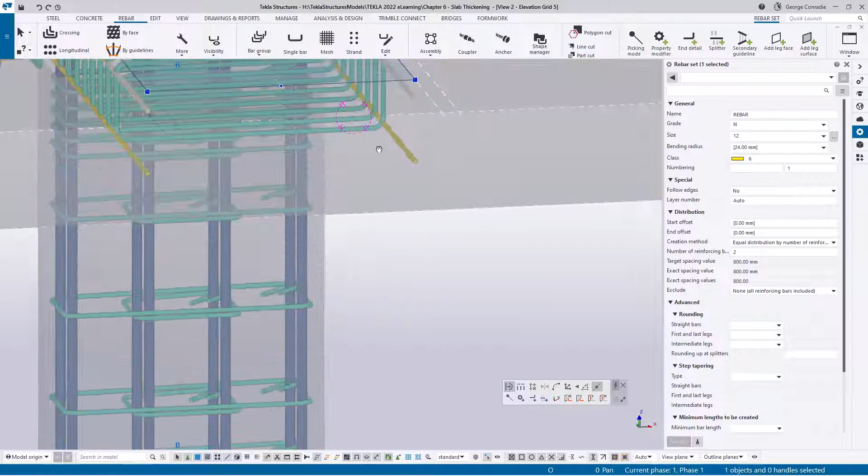Let's just swing it around a bit and click on the layer. We know that's got to be 2, so that's the first thing we fix up - the layer.

And then if we go Control P, if we look at this bar, this ligature, we can see it's got a rounding radius of 24. So from this little tangential intersection point here, it's 24 millimeters to the inside, and then we need half a bar. If we take 31 millimeters - this bar is 12 nominal, but the actual diameter is 14, so half of 14 is 7.

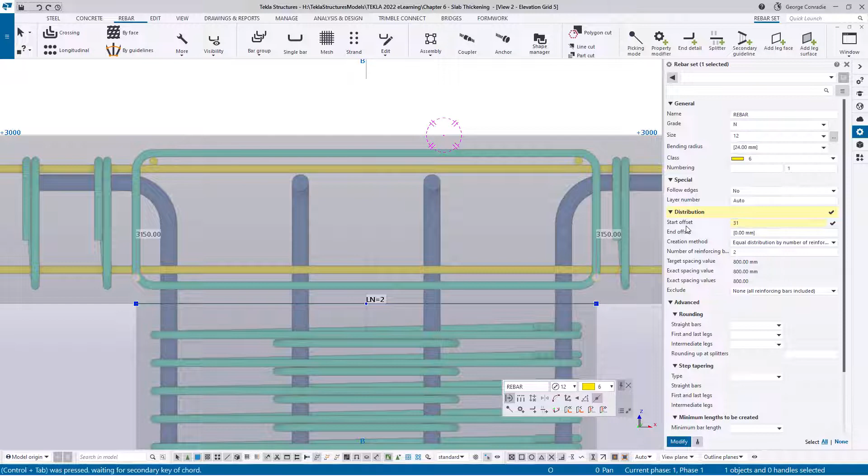So if we take this now and plug in 31 mils here, and also 31 mils here, and press enter, you can see it's actually put that bar centered about that tangential point from the arc into the straight line, and that's exactly where we want that bar. Knowing that, we can just do the same here, 31 and 31 again, enter, and that fixes up that bar. So those bars are now sorted out.

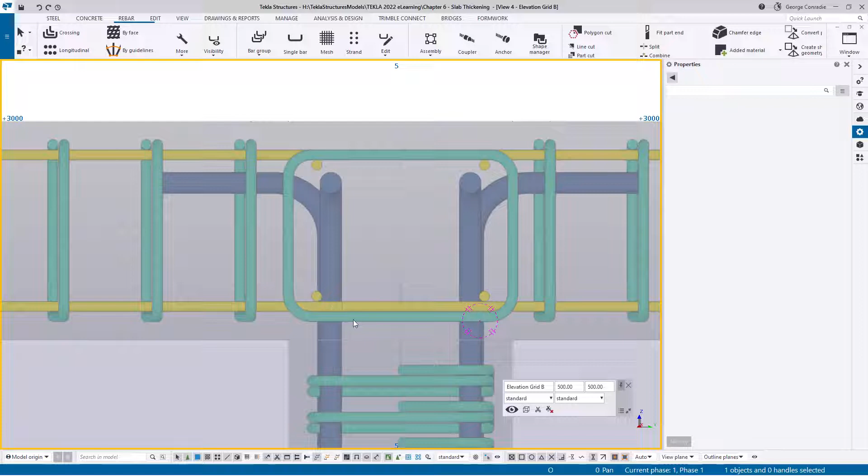Now let's look at the other direction. We'll go to this view and have a look at what we've got here. We've pretty much got that bar in the right place and this in the right place, although this face can essentially be face 2. If we click here and make this face 2, that brings that up - it hugs it better, just works better, as you can see there, so much better.

You do have a little bit of an issue, but they'll probably just move the bar across - not a big drama. You just get Control P straight on. So that works pretty well. I suppose you could go - oh, it's automatically picked something else than what I worked out. So let's just force the one I worked out, 31, and there we go, better dimension.

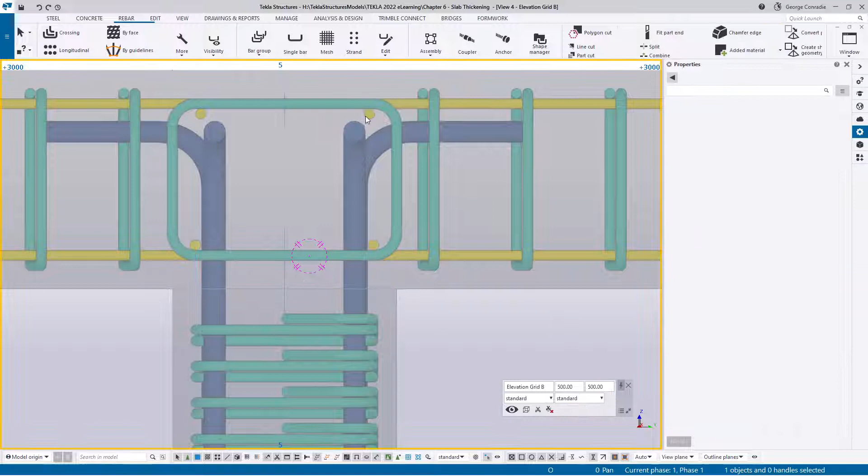I'll do the same with the top, just go 31 because I know that's correct - I've worked it out mathematically. If you look there, you can see the center of the bar is exactly at that tangential point, which is good, and you can see we've got that tangential point in the bars in the middle. So that works really, really well. Now we're clash free there.

Now to give this context, I'm going to go across to our level 3000 again, and for this I'm just going to switch off the construction lines. If you click and see it's already switched off, make sure you've actually clicked in your view so you've got this yellow banner, and now you'll see it's updated, so we can switch it off.

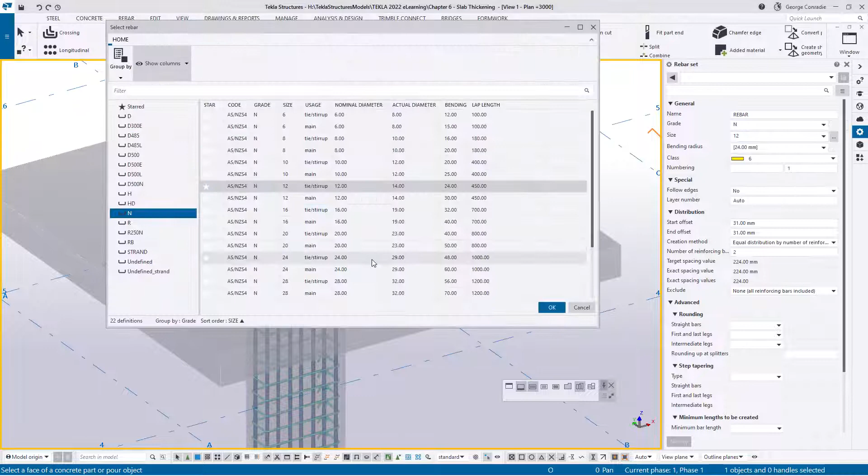Now to give it context, let's give it some slab reinforcement. For this, I'm going to say by face again, and let's pick a different color, a different diameter - let's make it 16s. Let's pick the red again, and I'll clear that, and for the spacing let's make it target and 200. So that's all done. And then top, we want both directions and we want the whole face. Now when I hover over this, we can pick a main direction.

So this one is going to be the main, so let's put it out at the bottom, and now we can just flick across to the bottom again. We can then pick this edge, and that one's done it correctly.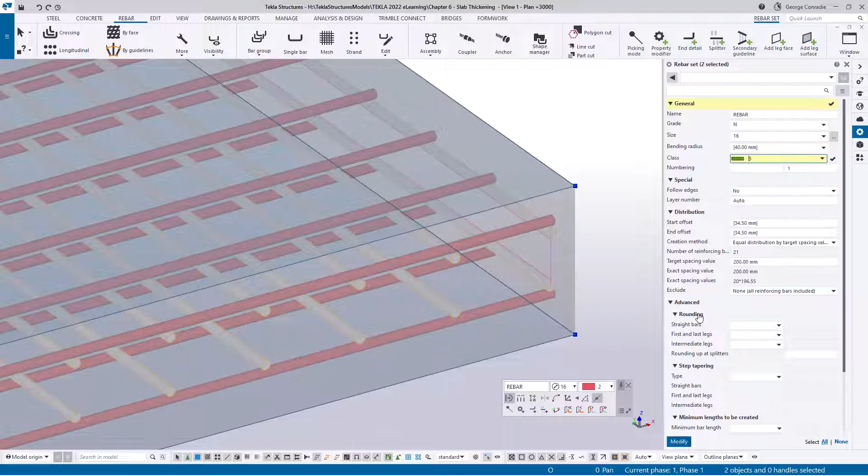Now all we need to do here is pick the secondary reinforcement and change it to green. It's good to have some form of assistance, a system with your coloring, so you can immediately see, in terms of layers and bar diameters, what you're looking at.

Now what we need to do is make sure that they're in the right level. You can see that's gone to a different level because we added this before the slab. So what I'm going to do is click on that, click on the face, and force that from 4 to 1, because we know this has got to be the first layer. And then also this one, we want to force from 4 to 2. That's the second layer. We'll look at the ligatures in a minute.

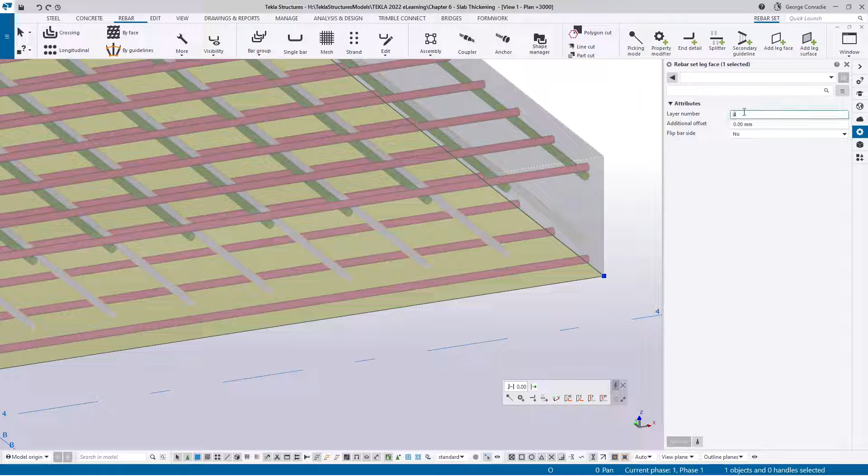This one's got to be our first layer, so that goes to 1. This one, it's got to be our second layer. And now we can look at our ligatures and make sure we've got that all sorted.

So in the short direction, that seems to work quite well, as you can see there. That really, really works well. And in the long direction, it actually works well as well. There's no problems there. It's just like the slab reinforcement.

We just need to look at the spacing for that. So if we go into the top view, 3000, I'll just grab this, and I'll start off by just adding, say, 100 millimeters there as an offset. That sometimes just sorts the problem out.

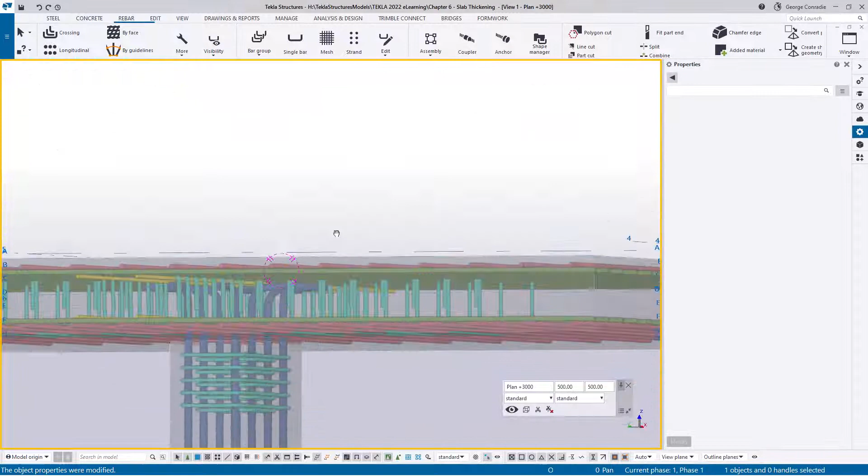And it looks like it does. Yep, if we look at that, looks pretty good. Yep, that really works well. I mean, yeah, we've still got a bit of a problem with the bars going through the column.

You can just move it, or otherwise what you can do is if you look at this, you can see we've got a spacing in the middle. So what we could do is just increase this or decrease it. Let's just increase it to 150, and then we should have a bar in the middle. It's just offset it a little bit.

Okay, so that didn't work. If that doesn't work, I mean, obviously I'm just trying to get a clash-free situation here, but your slab will be different, so you might have to manually move that bar. And there we go. That's pretty much just sorted out except for there.

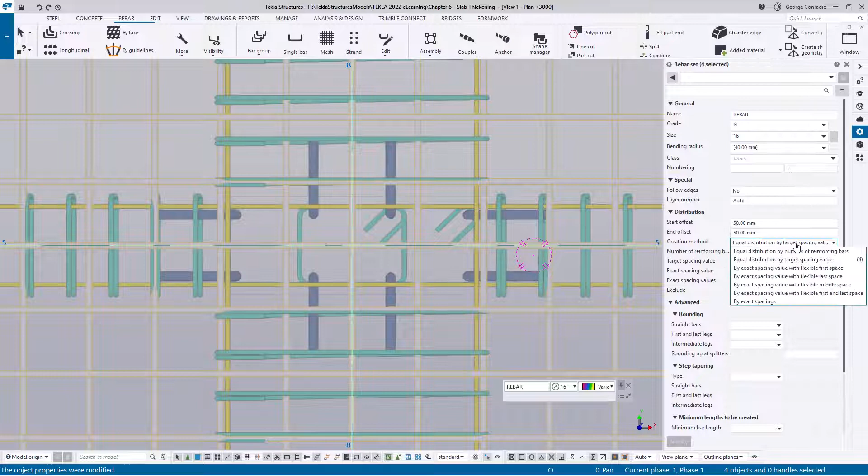So if we look at the spacing of these and say give us an odd last and end spacing, if we say modify, yep, that sort of works. Yeah, that sort of works, you know.

But I mean, don't worry too much about the slab reinforcement, because the slab is really big and there's a lot of reinforcement and they're all over the place and they're normally small bars. So if there's a bar that clashes, you can basically just click on the bar, click on the splitter, then go bring up your dimensions and say move edit, and you can just move that particular bar out of the way. So it's a pretty quick fix.

Now that we've got that, what I'll do is double click again, and it's just going to have a look in perspective mode. Also what I'll do is load our rebar, modify, okay.

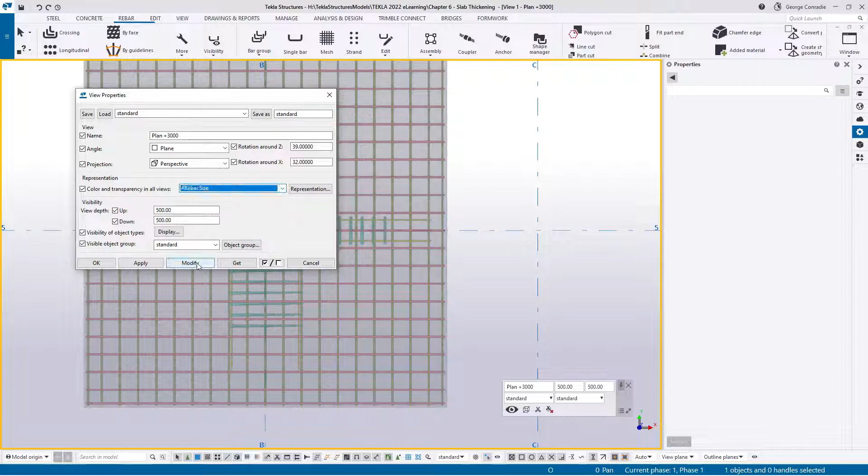And then what do we get? Okay, so in this case, you can see that our N12s have gone the opposite way. So what I can do is just in representation here quickly, I can say that the 12s are normally this color, and I'll make it visible again.

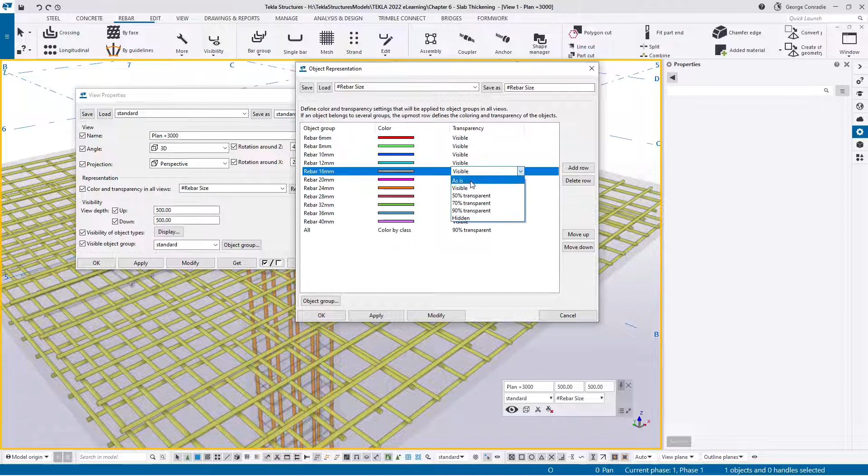And then this time what we want to do is make the slab reinforcement gray, and this I want to make 90. If I say save as, modify, apply, okay, we can now see what's happened here.

So we've got our two beams intersecting each other. This big one being the dominant one, as you can see, it follows over, the smaller one follows inside of it, and then this transparent bars on the outside is our 1 and 2 slab reinforcement. You can see how nicely that actually integrates with the other without having any clashes or issues.

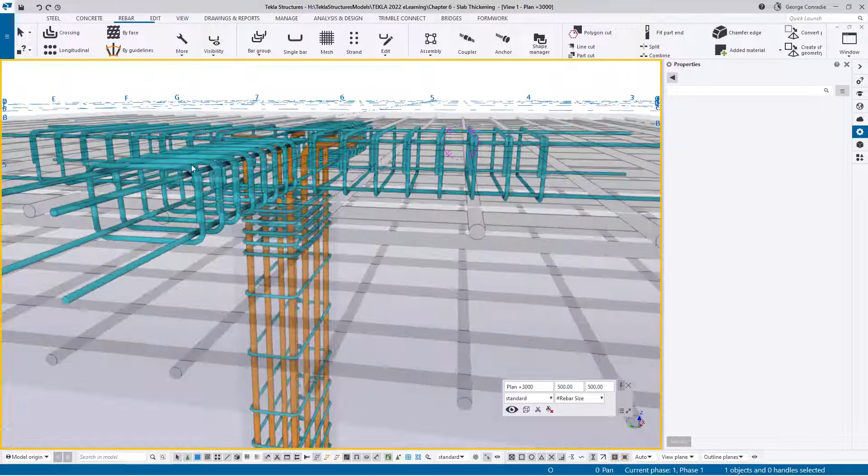So it really works well. If we look at this bar, you can see how nicely it sits. It's quite transparent, but it actually sits on top of this, in the same plane as the ligature, and the same in the other direction. So that really came out quite well.

Before we finish up this exercise, there's one more thing I'd like to show. I'm going to fix up the ortho mode and the display, and go to entire model. Sometimes with these bars, what I've done here is got the bottom reinforcement going all the way through, but sometimes they'll just let this reinforcement extend a little bit into the drop panel. It doesn't actually cross all the way through.

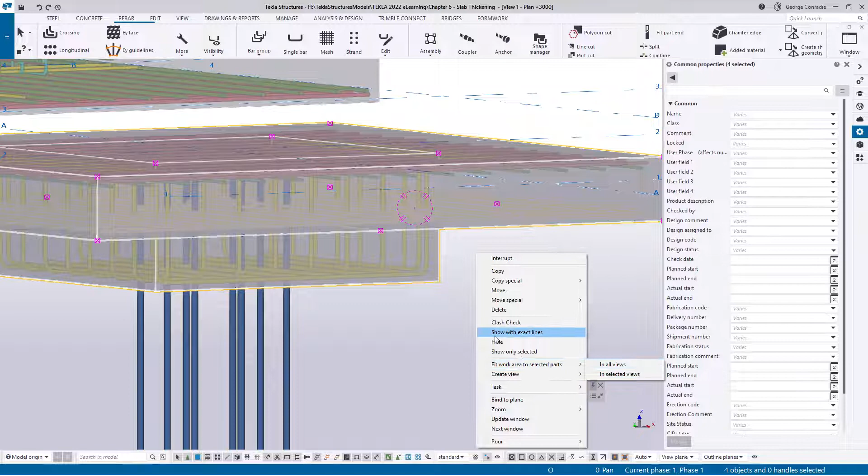So what I'm going to do is select the slab, the drop panel, and the bottom reinforcement, say show only selected, go Control P, and now I can see where the drop panel outline is. I can also see the bottom reinforcement. So all I have to do to chop those out is grab both of them, or I can go to Edit, and say Part Cut, and the part I want to cut is these two - you've got to make sure you don't select your slab.

I think I've just messed that one up. Let me just undo that quickly, and I'll select these two bars. Make sure you've got 4 objects selected - all the bars. Let me just redo that. I beg your pardon, I just accidentally clicked on the wrong stuff there.

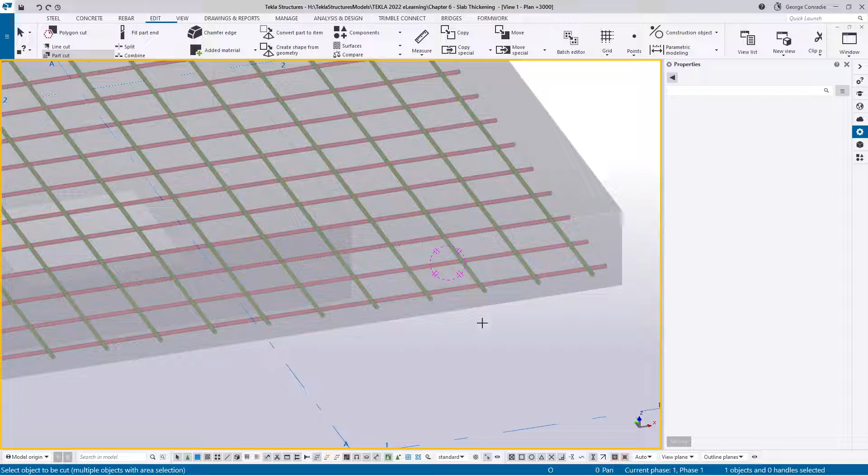So if we just isolate those one more time, I'm going to say for the part cut, select area for multiple parts. Now it's tricky when you have a scenario where you've got a slab in the way, but I'm going to pick these 2 reinforcement bars, and you can see we've picked them. For the cutting part I can click the actual drop panel, and that will clip the bottom 2 layer bars for us to the size of the panel.

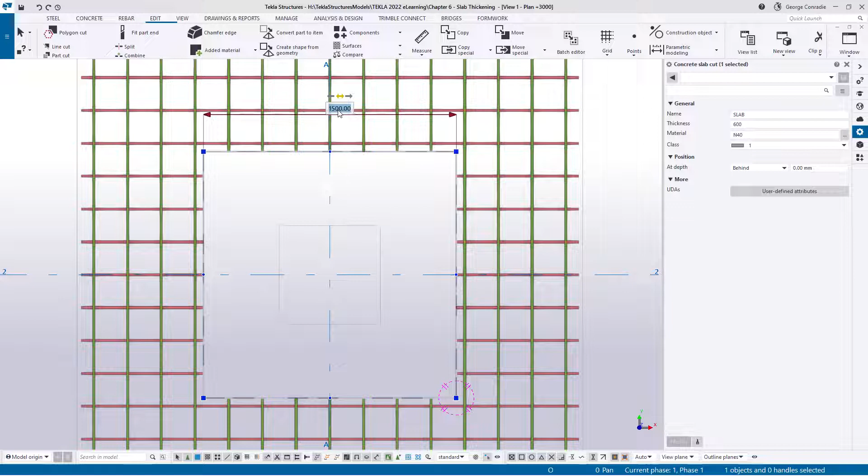Now the only thing we need to do is click on the actual physical cut, and we can change this dimension from the middle - I think for a 16 bar, 700, 350, let's make it 400, so let's make that 900. If we make that 900, you can see how that extends in - that one actually ends up crossing all the way. If we take this one and do the same, 900, that extends those. Actually in this direction we don't have to extend that, we can keep that like that.

Then in the other direction, if we click on this one, we can say we want to extend this way - it's the top one. If we make that 900 now, you can see how those bars then extend into that.

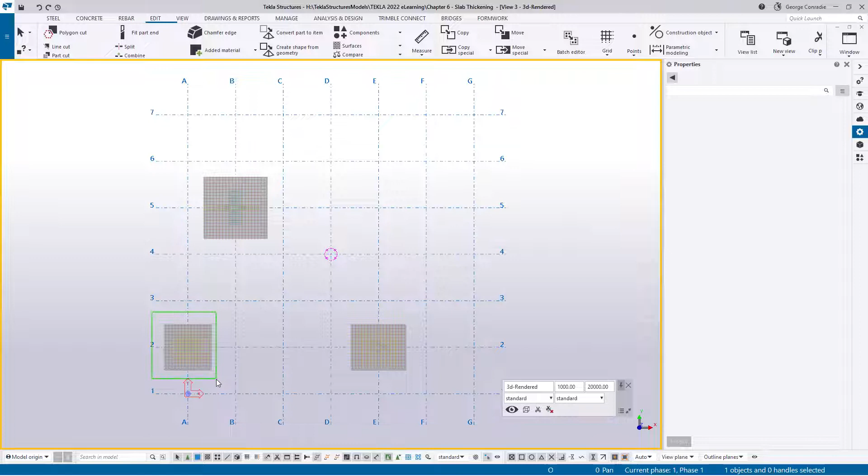Now if we do a redraw and look at this clearly, let's go to the rendered view and switch off - again, make sure you've clicked in it - switch off the construction lines, and go back to this panel, do a redraw, pick this one, isolate it. Now that we've got that, we can go back, double click in the screen, go back to our perspective mode, modify OK.

And now if we look at that, we can see the bottom reinforcement only projects whatever the engineer requires it to project, but it projects in there. So the reason I did that was just to show you guys that should you need to cut out reinforcement, you can cut it out by selecting a part cut - it's very easy to fix things like that.

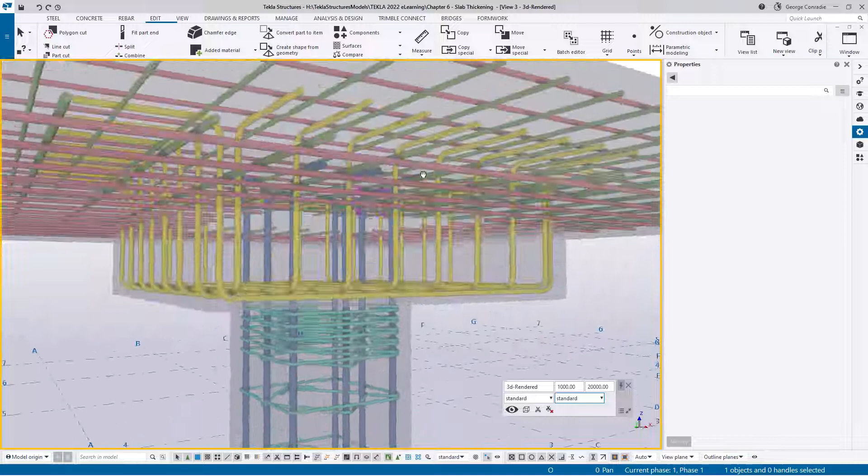I've had a lot of queries in the past where people say, you know, there's a hole in the slab, they put a hole in the slab and can't cut the reinforcement. If you're using rebar sets, it's fairly simple, you can do it. So hopefully this was useful and hopefully you've learned something from it, even if it's just a technique here or there. Apply these techniques to your project, and I'll see you in the next video.